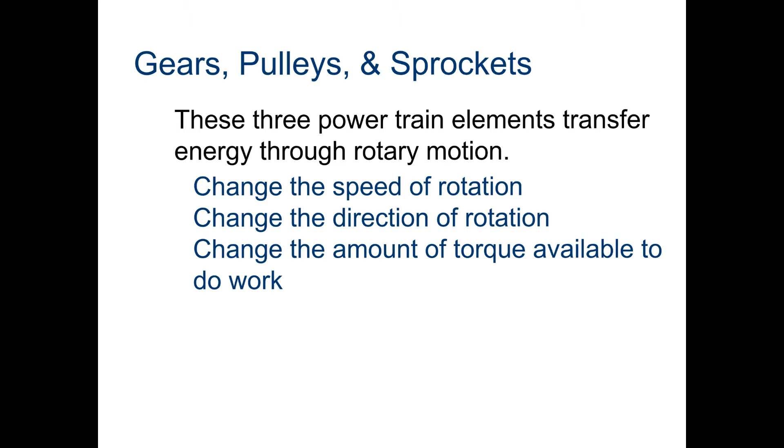This section is gears, pulley drives, and sprockets. These three powertrain elements transfer energy through rotary motion. You can have different gear sizes, pulley sizes, sprocket sizes to change the speed of motion, direction of rotation, and change the amount of torque available to do work. So the more torque, the more power you have to spin.

Gears. A gear train is a mechanism used for transferring rotary motion and torque through interlocking teeth. A gear train is made when two or more gears are meshed together. The driver gear causes the motion, and that motion is transferred to the driven gear. Does that make sense to everybody?

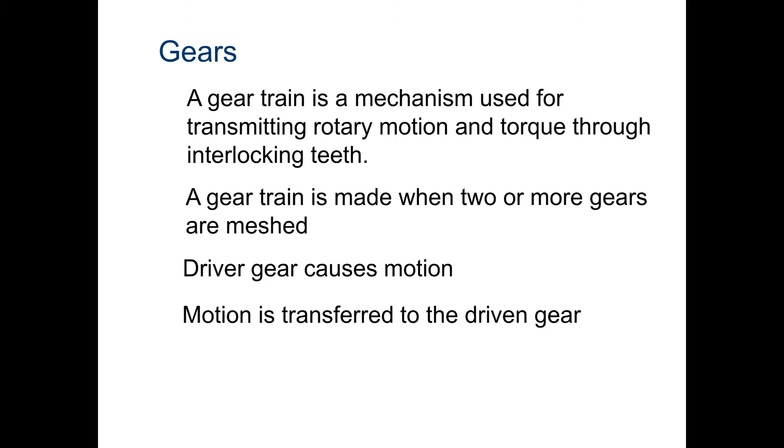Mating gears always turn in opposite directions. So this blue gear, if you turn it that way, the red gear is going to turn that way, and this blue gear is going to turn that way. So as you go down a gear train like that, you're going to switch directions each way. An idler gear allows the driver and driven gears to rotate in the same direction. So this red one would be an idle gear.

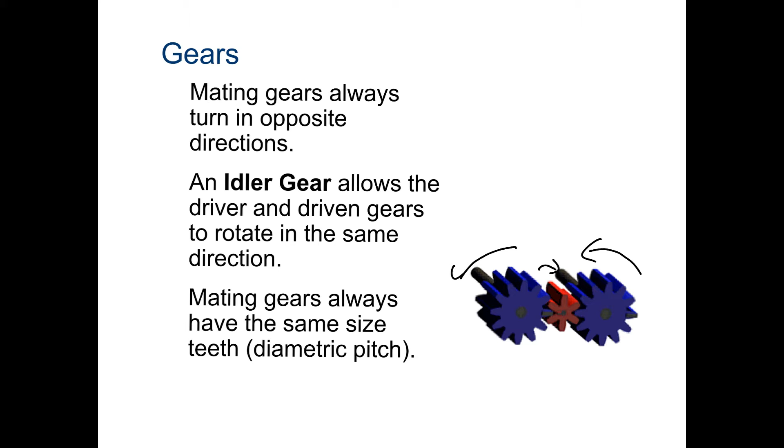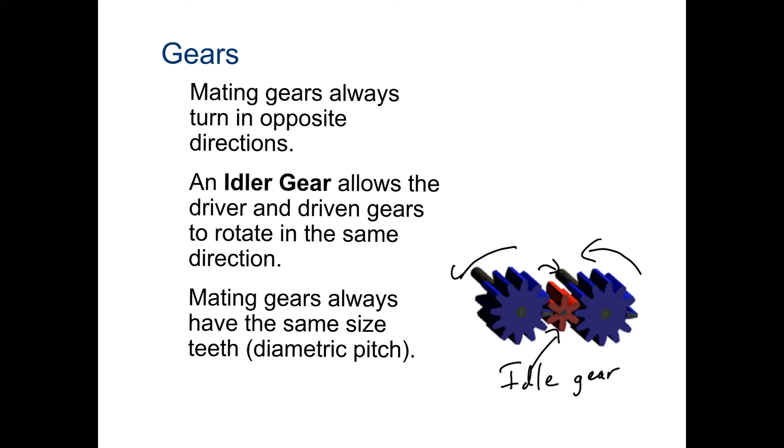Mating gears, like the two gears that are stuck together, always have to have the same size teeth, otherwise it won't work very well.

So RPM, revolutions per minute, of the larger gear is always smaller than that of a smaller gear. A smaller gear will turn more times in the same amount of time than the larger gear it's meshed to. Does that make sense to everybody?

So when you're slowing down the gear, that means you're adding more torque. You could lift more with, if you went from a small gear to a large gear, you could lift more than just the small gear by itself. Does that kind of make sense?

If you go from a big gear to a small gear, you're going to speed it up, but it's going to have less power. So if you drive a big gear and have that gear turn a small gear, the small gear is going to turn faster, but you're going to have less power on it. Does that kind of make sense?

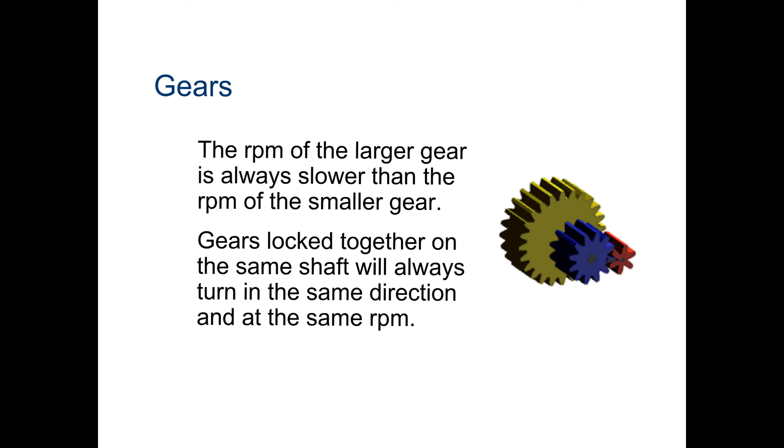Alright, so I'm just going to go through that again. N is the number of teeth, D is the diameter, the Greek symbol is the angular velocity or speed, that's how fast it turns in revolutions per minute. T is torque, that's how much turning force it has. You can think of it like that.

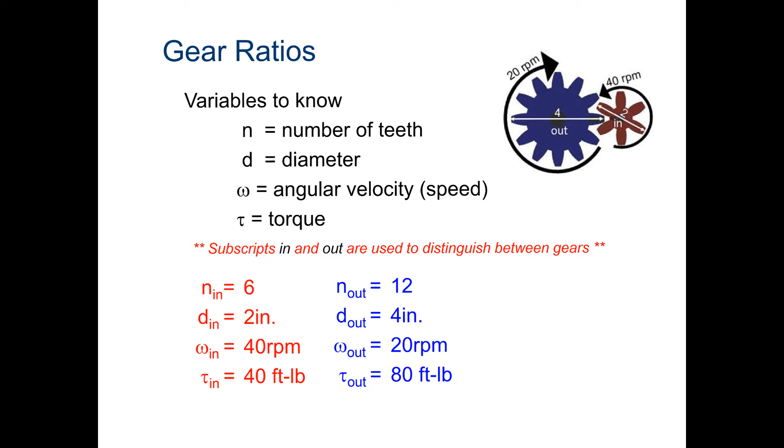These are our equations for gear ratio. Gear ratio is either the number of teeth in the gear that's going out over the number of teeth in the gear that's going in, the diameter of the output gear over the diameter of the input gear, the angular velocity of the input gear over the angular velocity of the output gear, or torque out over torque in. So notice that it's always out over in, except for angular velocity. Make sure you notice that one is different. Does that kind of make sense to everybody?

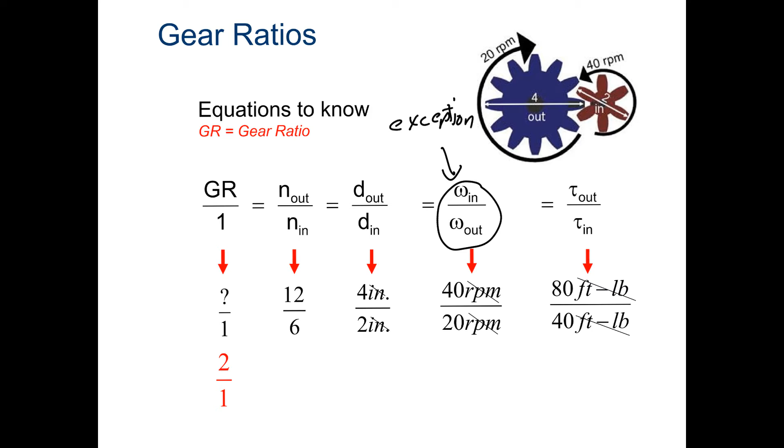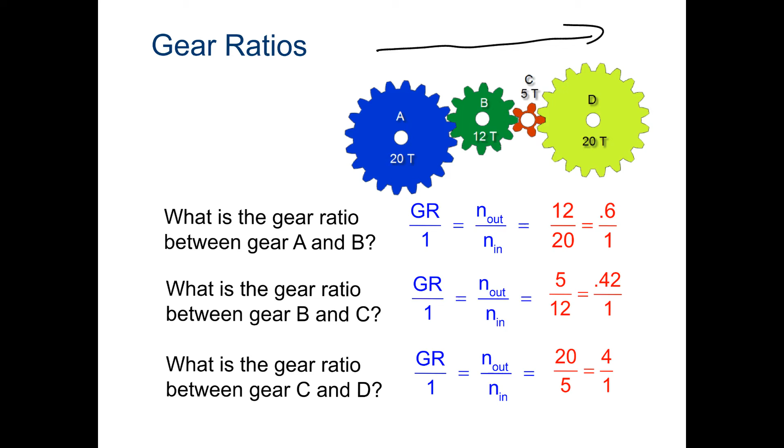So if we figure out the total gear ratio, we multiply all these together. So the gear ratio between A and B, B and C, and C and D. We multiply those all together, we get 1 for the gear ratio.

What would the gear ratio between A and D be, just by themselves? 1. 20 over 20, over 1.

So what really matters for a long gear train like this is the first gear and the last gear. The idler gears in the middle here don't matter. That's why they're called idler gears. All they're there for usually is to change the direction of a gear.

So you'll almost never see anybody put 4 gears in a row like this in an actual design, because that won't do any good. You might see somebody put a small gear in between 2 big gears if they want the 2 big gears to rotate in the same direction, or vice versa. Does that kind of make sense, what you'd put like 3 gears in a row for?

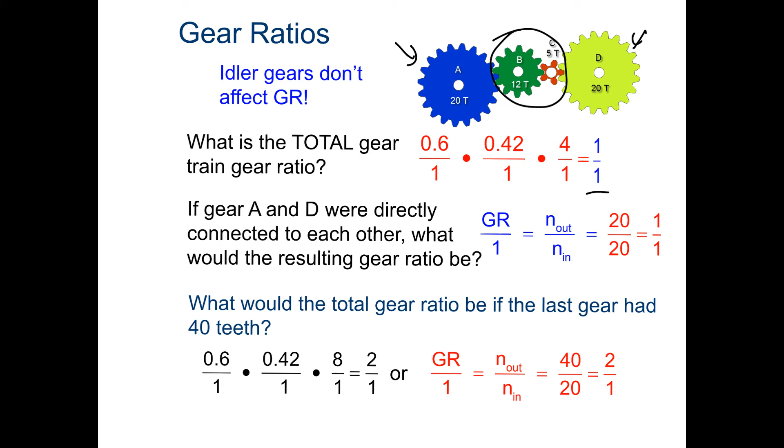Alright, and if the last one had 40 teeth, we do 40 teeth out over 20 teeth in, and the gear ratio would be 2. And if you added it all up the same way, you'd still get 2 if you did each individual set. Gear ratios for compound machines are going to be used similarly to mechanical advantage.

So instead of force out equals mechanical advantage times force in, either IMA or AMA, if you rearrange that equation, torque's going to work the same way. Gear ratio and torque are related like force: torque is equivalent to force, and gear ratio is equivalent to mechanical advantage. To find the total gear ratio, you multiply all of the individual gear ratios together.

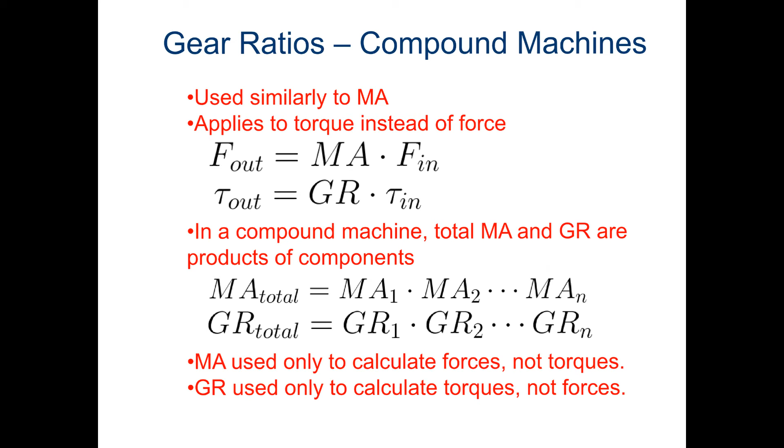Does that kind of make sense? It's a little complicated here, we've got a couple different things going on. We have a wheel and axle for this one, another little wheel and axle down here, and then a gear ratio. Does that make sense to everybody? You have to go through each of those things individually in this compound machine.

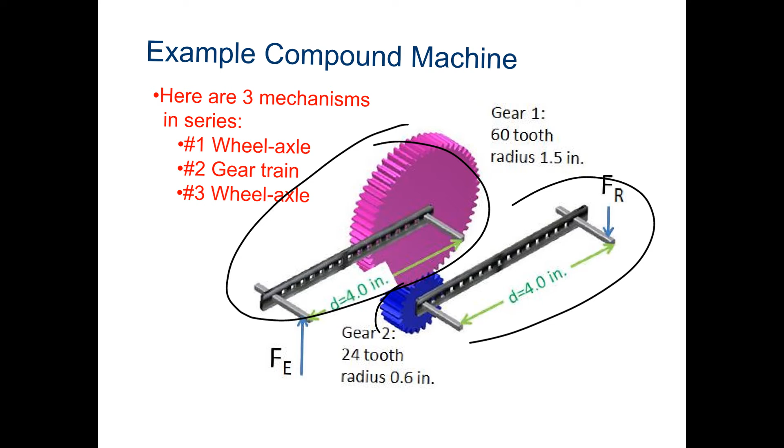It's just a wheel and axle, so our mechanical advantage is the effort distance over the resistance distance. What's our effort distance here? If we're applying the force out here, our effort distance is the distance from there to there, so 4 inches. Our resistance distance is going to be 1.5, the radius of the gear, because the output force is applied to this other gear. Does that make sense? So our first mechanical advantage of that first machine is 2.67, 4 inches over 1.5 inches.

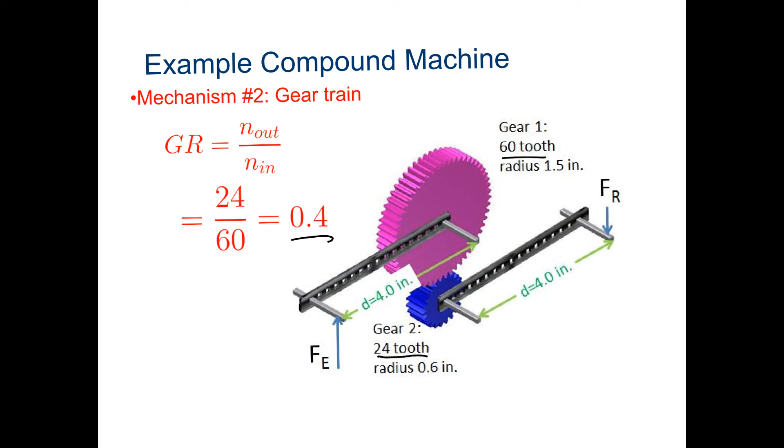Any questions on any part of this? Next we're going to find our gear ratio. It's important to remember the gear ratio does not actually affect the mechanical advantage at all. This time we have number of teeth out over number of teeth in. We've got 24 teeth for the blue gear, the output gear, and 60 teeth for the pink gear, the input gear, so 24 over 60 is 0.4 for our gear ratio. Everybody understand how we got that?

Now we have our last mechanical advantage here. This time the effort force, this part can get a little confusing: since the blue gear is being turned, its radius is going to be our effort force distance, and the resistance force is the length of the arm for that distance. So we end up with 0.6 inches, the radius of the blue gear, divided by 4 inches, the length of the arm, and our mechanical advantage is 0.15. Any questions on that?

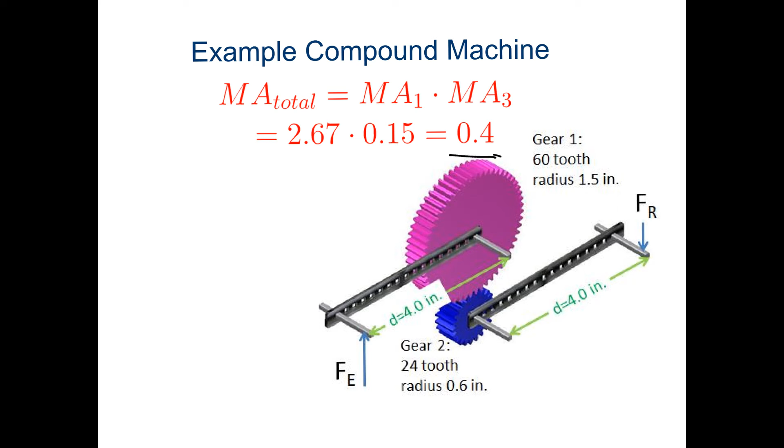So the last thing we do is multiply the two mechanical advantages together to find the total mechanical advantage of the compound machine. So it's 2.67 times 0.15, and our mechanical advantage is 0.4. The gear ratio is just 0.4, which is just the ratio of those two gears.

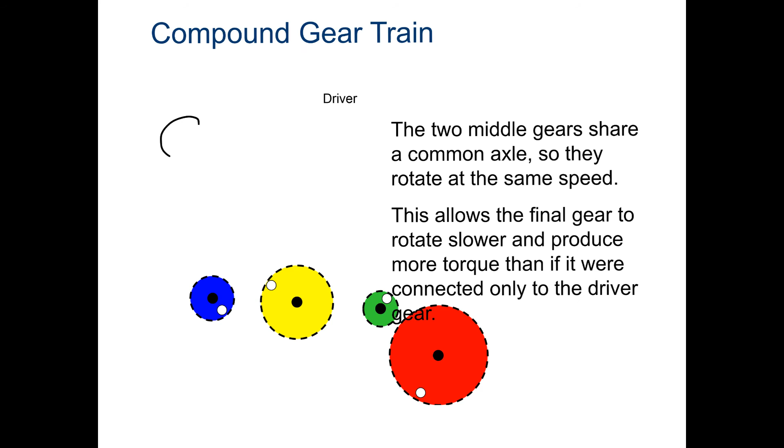Train: if we had the actual thing, these are supposed to all come together like in a cool machine that spins, but on this they won't. What it's supposed to look like is you have a gear here, and another gear here, and another gear on the same axle. Does that make sense? Then this other gear is meshed with that gear, and there'll be a better picture on the next slide. The two middle gears share a common axle, which means you have a compound gear train. That's how you make multiple gears to keep getting a bigger and bigger gear ratio, or a smaller and smaller gear ratio.

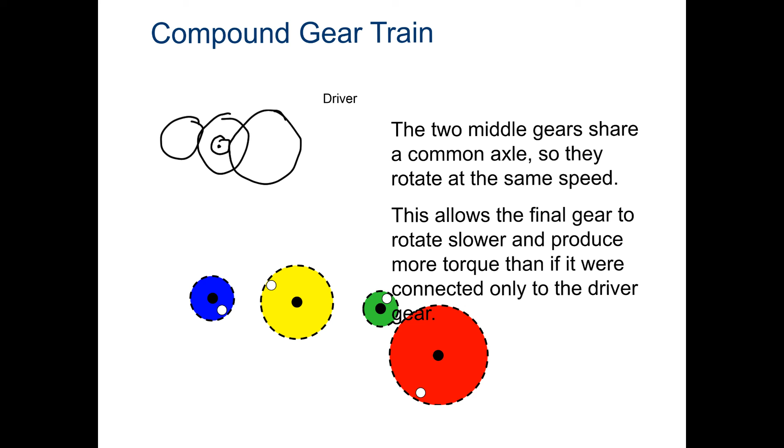And this is going the way it is here: the driver over here is going to slow it down, so it's going to be a slower turning thing. D is going to turn slower than A, but it's going to have a lot more torque, so a lot more power to do things. If you went the opposite direction, A would turn much faster than D. So if you wanted to speed something up, you'd go the opposite direction, and A would have a lot more speed but less torque.

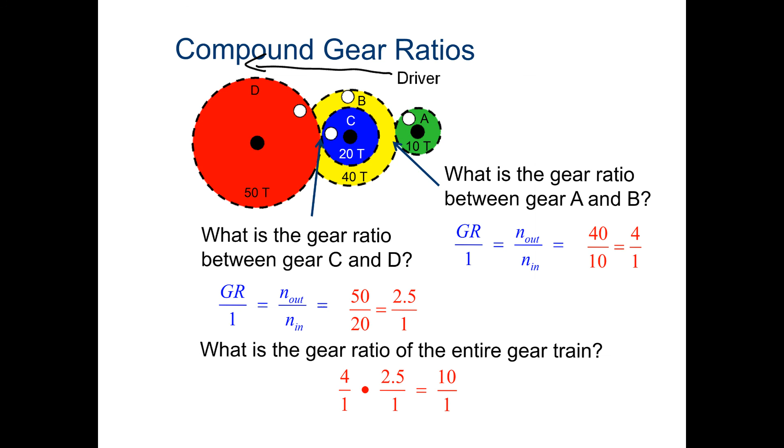Pulleys and belt systems: pulleys work essentially the same way as gears, except we don't have the number of teeth. So the equations are the same for their ratios here, but you don't have number of teeth in that equation. Again, if you turn this one at 30, this one's going to go slower.

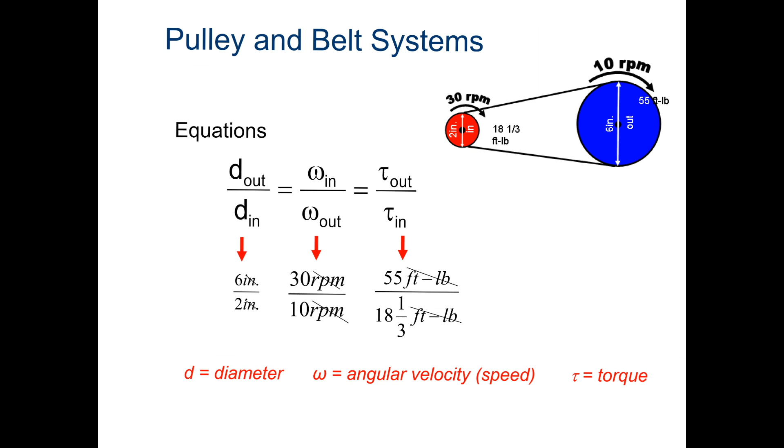Last one we'll talk about is sprocket and chains. Again, these are the exact same as gears, except they just have a chain connecting them, and they work the exact same way. So again, faster at the smaller gear, slower at the larger gear, or sprocket in this case.

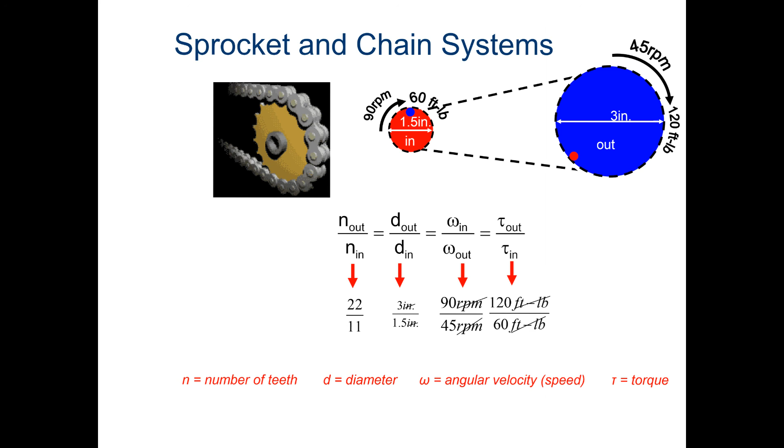Alright, you guys have any questions over any of this?